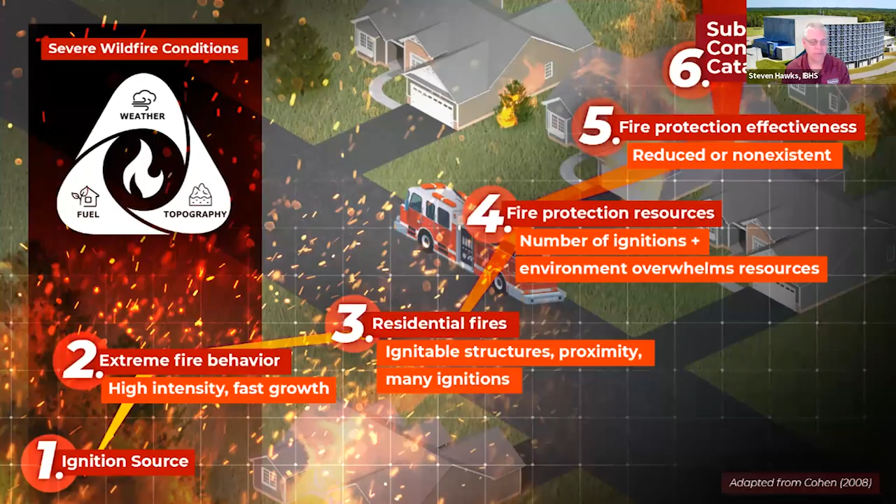And when that occurs under these strong wind conditions, then it can lead to a suburban conflagration, like we've seen on the Carr Fire, the Camp Fire, Tubbs Fire, recently with the Lahaina fire, to name just a few. I really like this picture here. It was taken on the Camp Fire, and NIST conducted a post-fire analysis of the Camp Fire and has produced 4 documents related to that, and has another one, a 5th one, to come in the near future.

And so Alex Maranghides from NIST conducted a lot of technical discussions, and one was with a CAL FIRE engine company that was in this neighborhood. CAL FIRE took these pictures, and this is in Magalia, California, just north of Paradise. And I really like it because you can see the 3 means of transportation that the fire can take to get to a house. So if you can see my cursor, the fire in the picture on the left is on the fence and the tree.

So that direct flame contact from the tree is getting to the structure. And I think you can see maybe a little bit of fire underneath the eaves right here. So direct flame contact can extend the fire from a tree or some other burning object directly to the house. Radiant heat from these items burning together can also extend that fire to the structure. And then up here above the house, you see all the embers coming off the tree and other items burning nearby that are landing on this structure and then being carried downwind and landing on other structures. So those are the 3 modes of transportation that a fire can take to get to a structure.

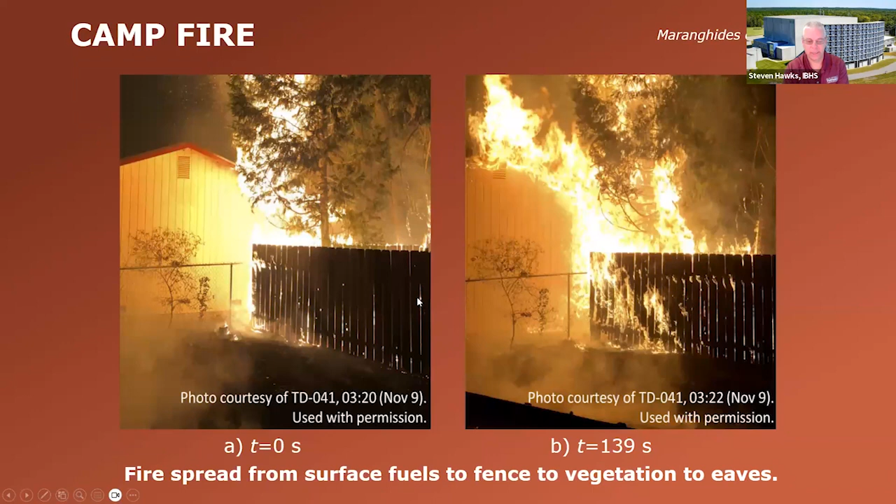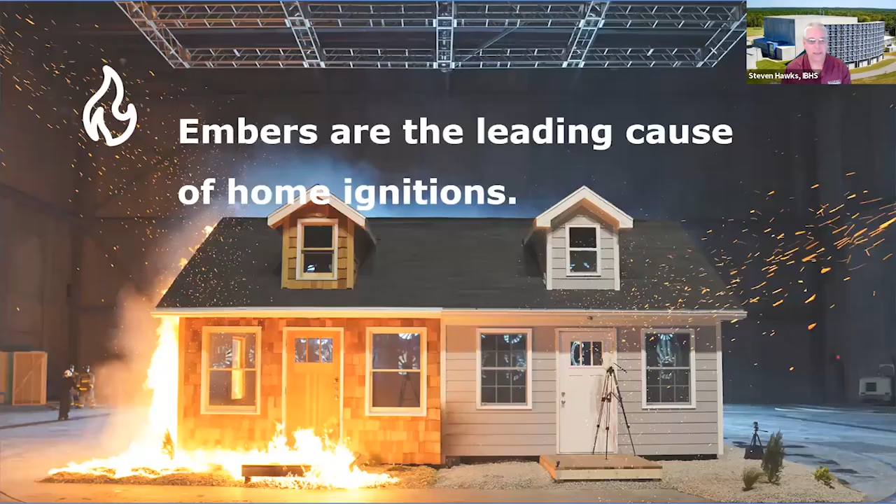And when you combine things like combustible items on the ground, maybe wood debris, leaves, pine needles, mulch, the fence, this tree, all those things burning together create enough intensity and enough direct flame contact that they could ignite that structure and bring it to the ground. So embers and flames, that's what we need to protect our structures against. And through a lot of experiments that we've conducted at the lab, not only us, but also other research organizations like NIST, as well as post-fire analysis, we've determined that embers are the leading cause of home ignitions.

And so first and foremost, we need to deal with the embers because they're always present, no matter whether the fire is in grass, brush, timber, or burning fences or other outbuildings or other items on a property. If it is a combustible item and it can burn, it can also produce embers. And then those can transmit to the house, either directly by igniting something on or within the house if the embers pass through a vent, or if they land in the 5 feet immediately surrounding a structure. If an ember lands in that area, it can ignite items within that first 5 feet and then indirectly extend that fire to the house itself.

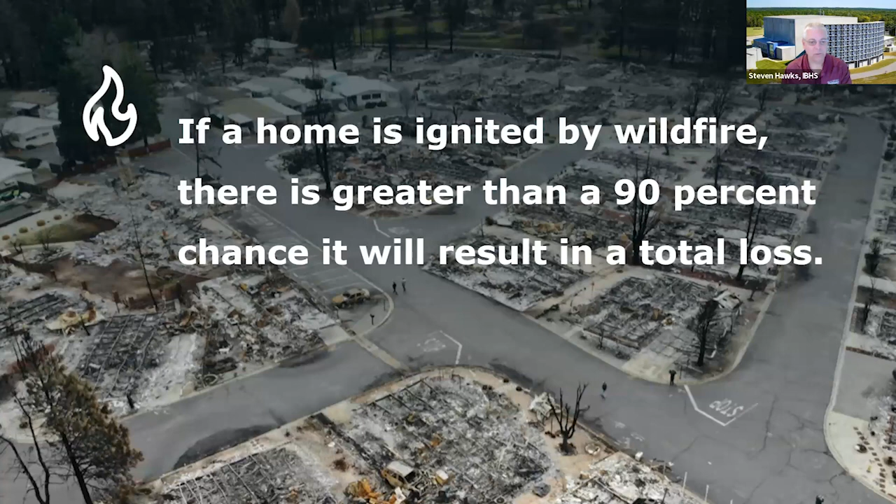And we know from the CAL FIRE damage inspection database that if a home catches fire, there is greater than 90% chance that the house will be completely destroyed. So we need to protect homes from catching fire in the first place.

And so I really like this picture. This is inside the test chamber at the IBHS Research Center in South Carolina. And you can see we have ember generators that we can expose a structure to embers and then see how those embers flow around the structure and how they interact with the different building materials and components of the structure.

So first, you can see that a certain number of embers flow up over top of the structure. They also get underneath the eaves and can travel in through vents at the eave line, as well as if there's any spacing between the roof structure and the wall where that intersection comes together. Potentially those embers can get in through those areas into the attic space. Embers also flow around the structure to the sides.

And then the last thing, and one of the biggest and most important things to understand about this picture, is the vortex that's created as these embers are cast by the wind. In this picture on the right-hand side is our big bank of fans, and it's blowing these embers up against this structure. When the embers are cast up against the structure, it creates a pressure against that structure and causes a certain number of these embers to travel down and then back away from the structure. So these embers are being pushed out away from it.

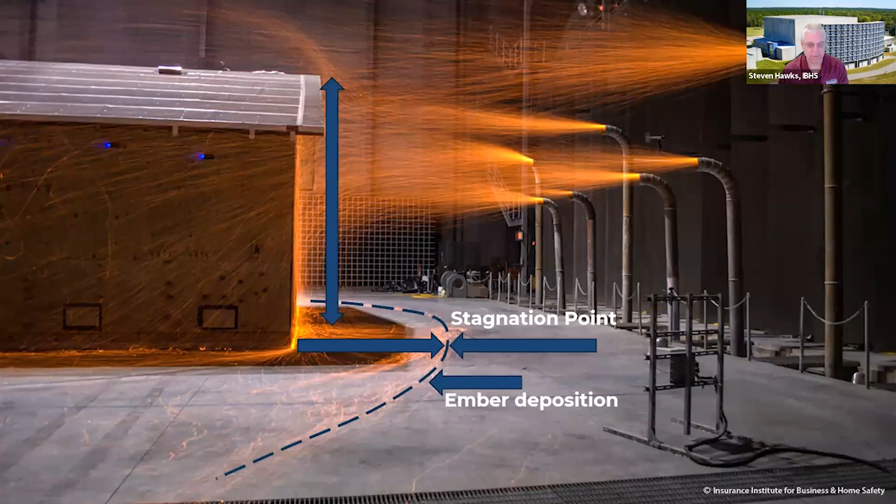So now I'd like to switch and talk about each of the exterior components of the structure, starting at the roof line down to the ground. Then we'll talk about decks, fences, and outbuildings. On the screen, one of our researchers, Faraz Hedayati, looked at a lot of papers, finding where certain things are cited about each of the different components and bringing forth all the relevant research conducted in wildfire mitigation related to the built environment.

And we definitely see a statistical correlation between wood roofs and loss of the structure. Fortunately, over 99% of the structures in California have a Class A rated roof already. So a wood roof is not something we see a lot out there in California.

But if there is still a wood roof, particularly a non-fire retardant treated wood roof, it definitely needs to be replaced because the roof is the most vulnerable component of the structure. It sits high up, it's a large surface area, has a tendency to allow for the accumulation of debris, and also allows for the accumulation of embers during a wildfire. It's never a good thing to bring those two together, especially on a combustible wood roof, and that could lead to the loss of the structure.

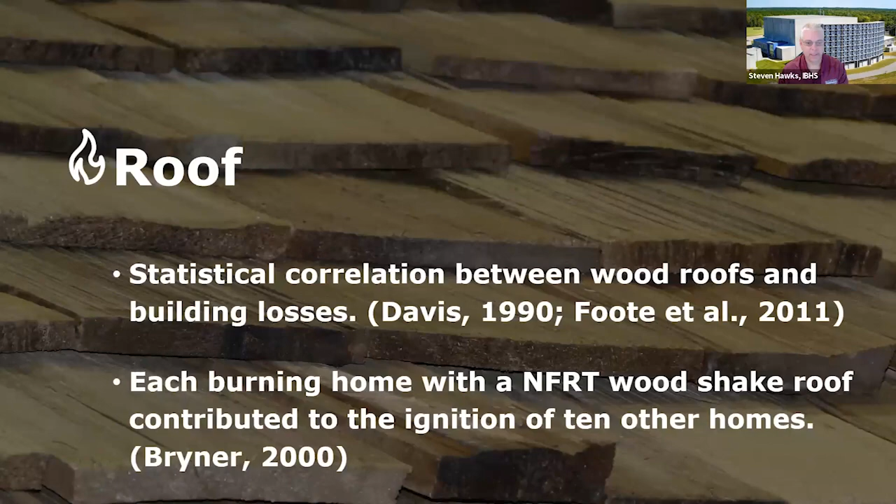We've also seen that, as I just mentioned, because of the design of a roof, debris can accumulate in the valleys and in gutters and other areas of the roof line. And wherever debris tends to accumulate is also where embers during a wildfire will gravitate to for the same reason as the debris does. And when you ignite those two, it's never a good thing. But having a Class A rated roof will hopefully allow that material to burn off and the roof will stay intact and protect the home.

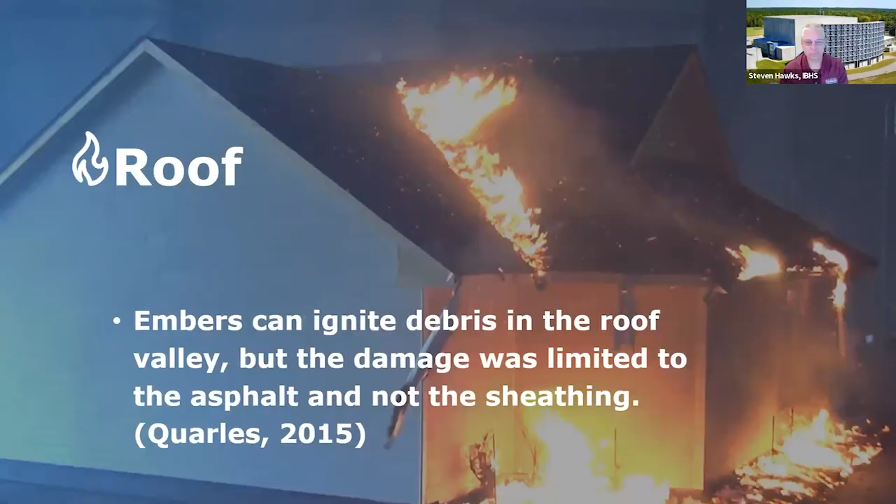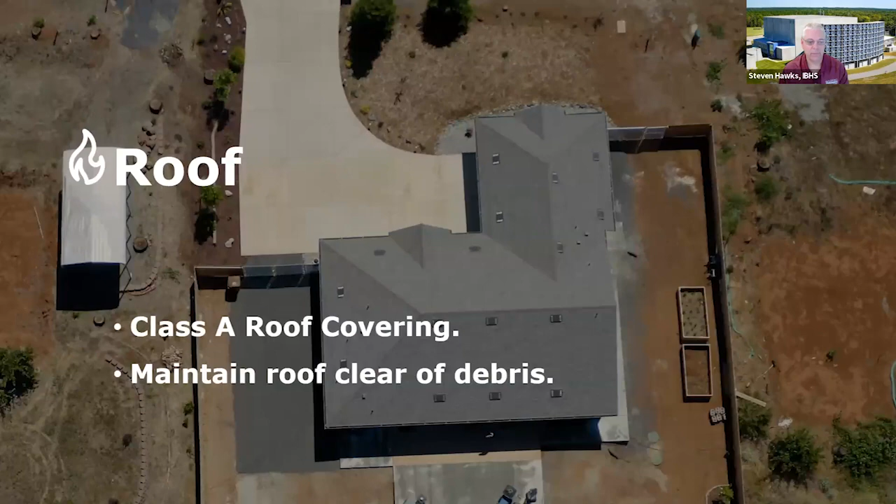So our guidance on roofs is first, have a Class A rated roof. And then secondly, maintain that roof clear of debris at all times, particularly when wildfires are prone in California during the summer months.

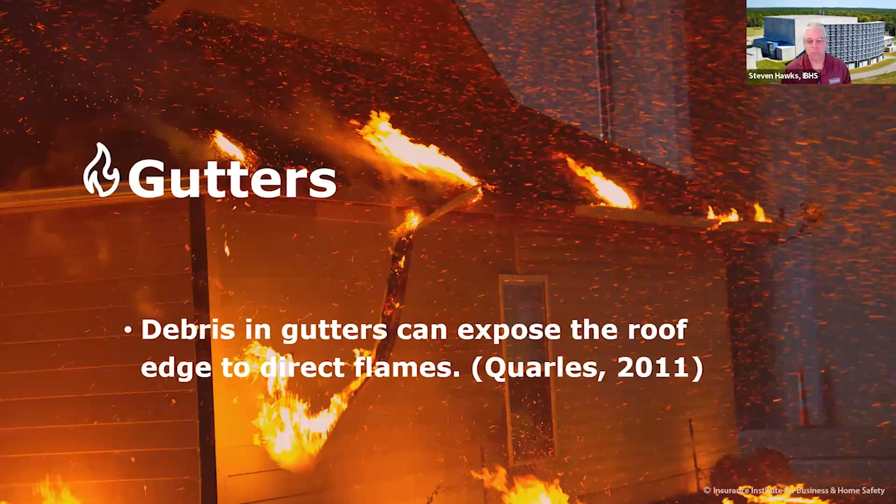And when you have a vinyl gutter, that can melt and drop to the ground, exposing the wood fascia board behind it, which exposes that roof's edge to direct flame contact. When you have a metal gutter, even though the debris may be burning inside, that metal gutter is protecting that wood fascia board and that roof's edge from that direct flame contact.

So our guidance for gutters is non-combustible gutters and downspouts, and then maintain a non-combustible gutter cover over top of that to prevent debris from accumulating inside the gutter. However, in this example, debris can accumulate on top of the gutter up against the edge of the roof right here. So even though you put a non-combustible gutter cover on, it still likely does require some maintenance of clearing off debris from on top of that gutter. We don't ever want debris accumulating here and then embers igniting that debris right at the roof line. So it still does require some maintenance of debris.

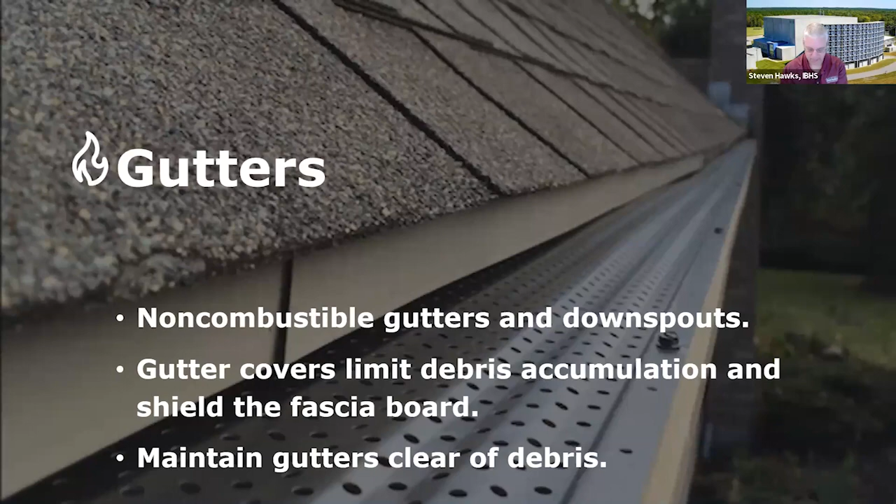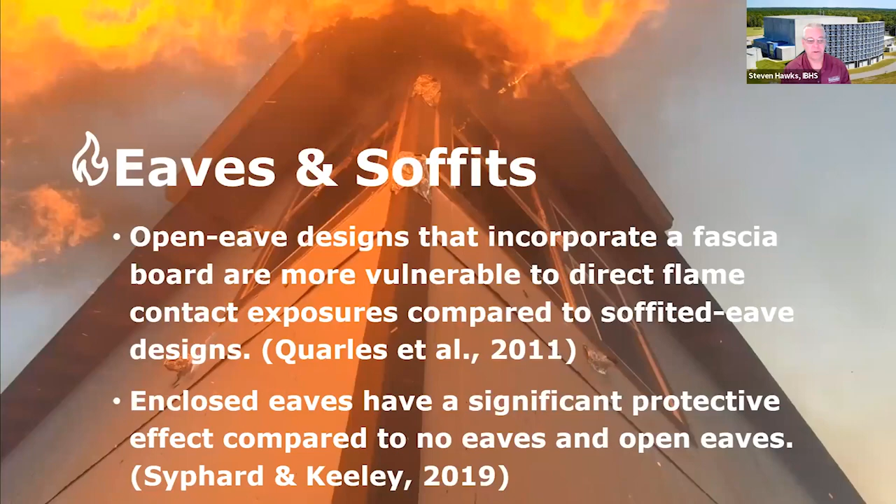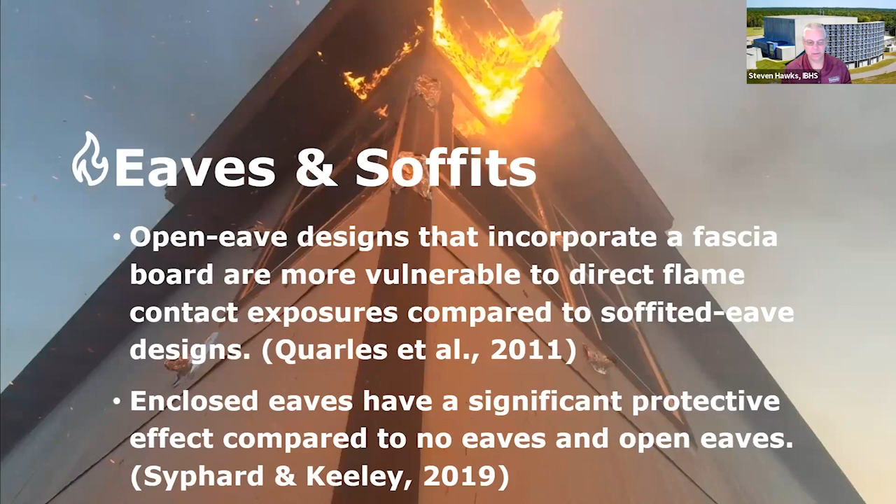Okay, eaves and soffits. So open eave designs that incorporate a wood fascia board are vulnerable to direct flame contact, as you're seeing in this experiment that we conducted just outside the test chamber at our facility in South Carolina. They're an area where flame and heat can accumulate underneath, and they're also areas where vents are located. And when you put that combination of things together, that allows for the fire to get developed underneath the eave line, to travel in through openings in wood blocking or through the vents themselves, and then could lead to the destruction of the house. So the guidance for eaves and soffits is to enclose them and do that with non-combustible materials.

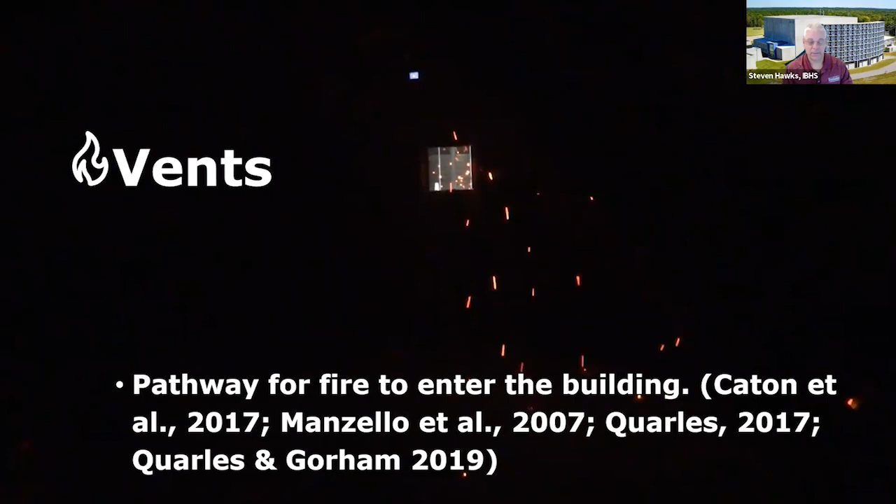Vents with just metal mesh greater than 1/8 of an inch, as you see here in the video, allow for embers to pass through into the space behind wherever that vent is located, whether it's a foundational vent or an attic vent, or a vent that's up on the roof line. So our guidance for this is vents with metal mesh that is non-corrosive, that have openings of 1/8 inch or less. Now we like to say 1/8 inch is the best because it prevents the embers from passing through that have enough energy in them to ignite something combustible on the other side of that vent.

So when you get down to a 1/16 of an inch vent, then those vents tend to clog up a little bit easier and don't perform their normal function of allowing airflow to get in and out of the structure to keep moisture down inside the attic space. So it's a combination of trying to accommodate for what the vents are normally designed for, airflow and keeping moisture out of the attic space, as well as providing for fire protection.

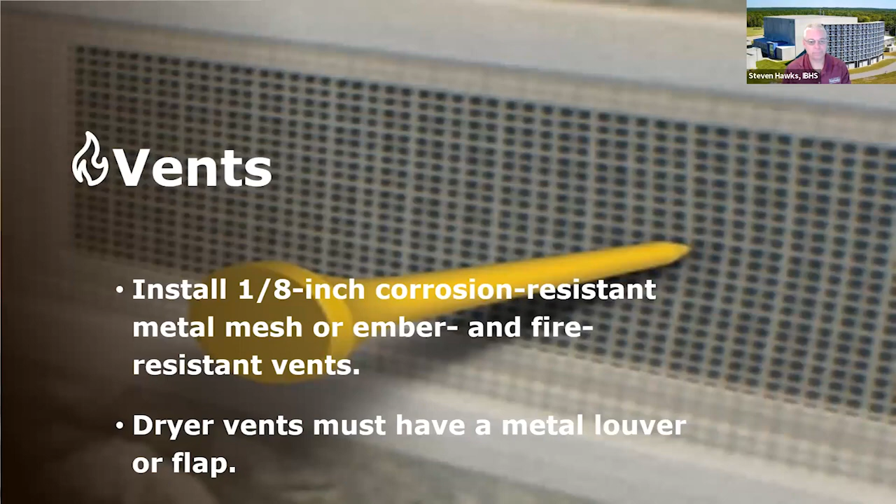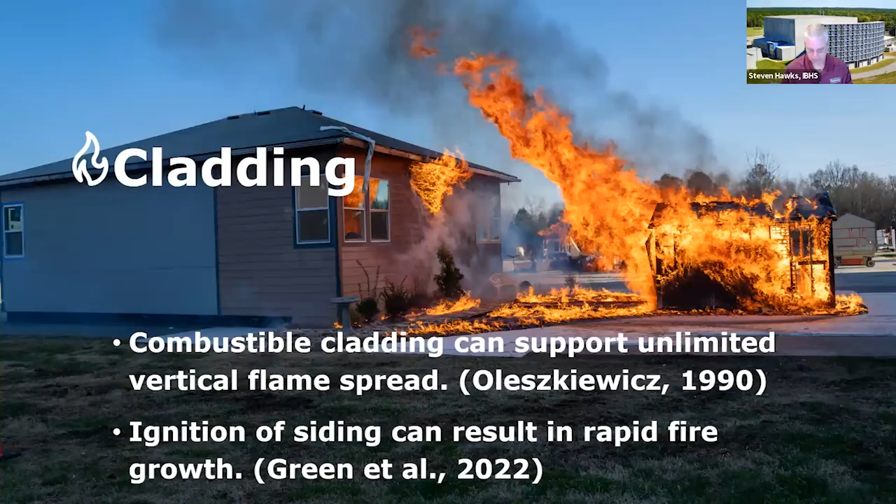For siding, combustible cladding or siding allows the fire to spread quickly vertically and expose other areas of the structure like windows, the under eave area, vents to the fire, and can result in rapid fire growth. So what we like to say is non-combustible siding reduces the vulnerability of walls to flames.

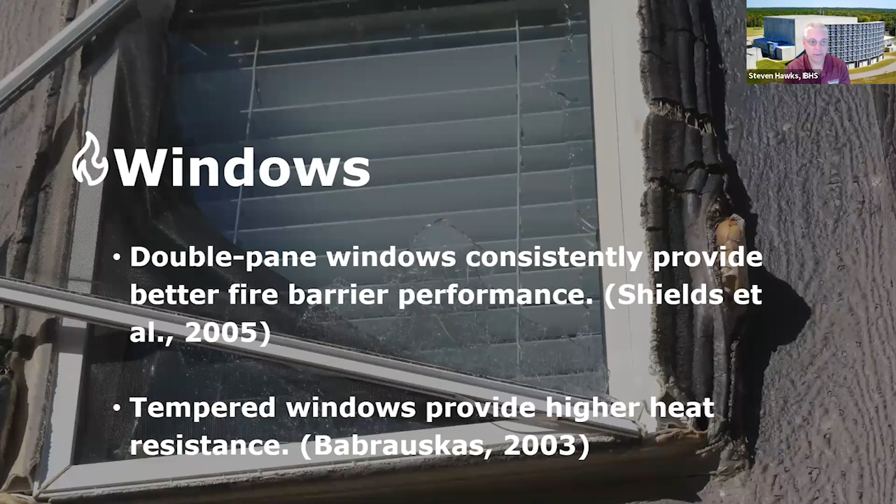Also, this frame that holds up this vinyl screen that was over top, you see it bent down here, but screens do provide good protection for windows from heat and provide added protection to the glass behind it, allowing it to withstand radiant heat longer than it would if the screen wasn't there in place.

So the guidance here is multi-pane windows with at least 2 panes, and both of those panes being tempered glass provides the best protection. And where you have a window that is openable, have a screen that covers that area, so that in the event that that window is open and you're unable to shut it as the fire is approaching, that'll provide some level of protection, hopefully enough to not allow embers and flame to get inside. But it also does provide an added layer of protection to the glass behind it, helping to make it stand up to the radiant heat for a longer period of time.

Now, Underwriters Laboratories, their Fire Safety Research Institute, is conducting some testing on windows right now. And they're looking at different configurations of windows, both being dual paned, but dual pane with both panes being annealed glass, dual pane with 1 pane being annealed and 1 pane being tempered, in different configurations of the tempered being on the outside pane or the inside pane, or a dual pane where both panes are tempered glass.

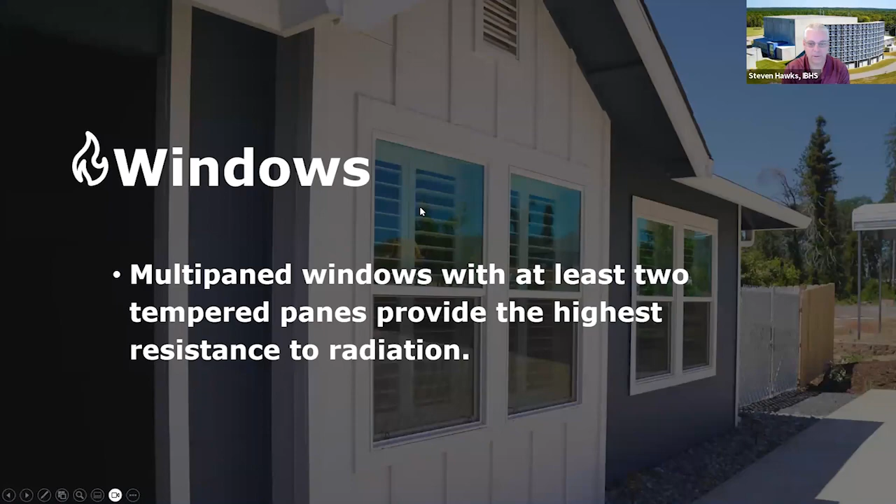So on the doors, the vulnerability here is the base of the doors, really from accumulation of debris and embers getting up against the doors and the wood framing of the door itself. NIST was able to, during their post-fire analysis of the Waldo Canyon fire, determine that this was a frequent damage on that fire. We've seen this in other large fires as well, that doors can be a vulnerability. And so the guidance for doors is to have a fire rated door with at least a 20-minute fire rating, or have one that is non-combustible, metal, fiberglass, or something similar.

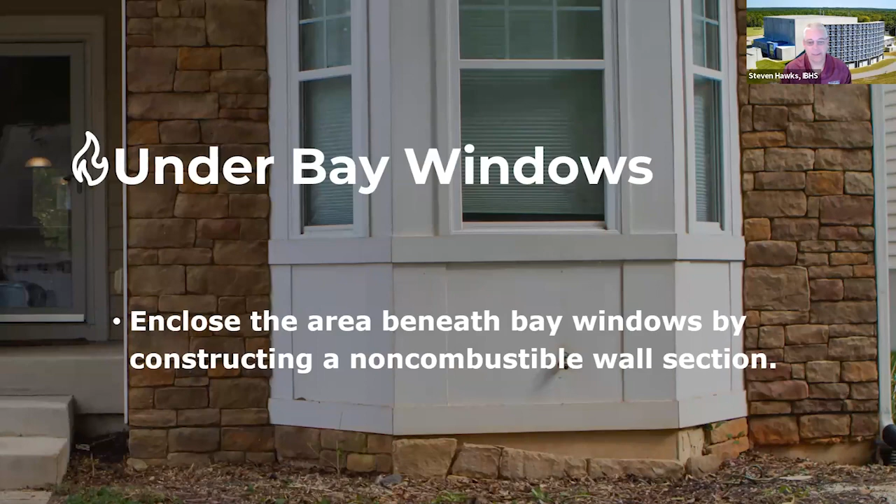So our guidance is to extend this wall all the way to the ground and make it non-combustible materials, so that fire doesn't have a chance to get underneath that bay window and present a problem, because under bay windows can be considered very similar to underneath an eave, where heat and fire can get trapped in that area and present a problem.

So 6 inches of vertical non-combustible space. Remember, if I go back to the couple slides I showed of the embers with the research that was done in our test chamber at our laboratory in South Carolina, that those heavy embers fall to the ground and travel right along the base of the ground and that wall where they intersect. And so that's why we recommend 6 inches of vertical non-combustible area there.

It also happens to coincide with moisture issues unrelated to fire that codes are taking into consideration, that have stem wall that comes up off the ground, keeping the wood and other items off the ground because of moisture issues. Well, this is a co-benefit of also taking into consideration wildfire preparedness of that 6 inches, because if you have debris, even if you're really on top of clearing debris from around your home, during a wildfire event that's associated with wind, debris can come out of trees, blow up against the structure, accumulate in this area.

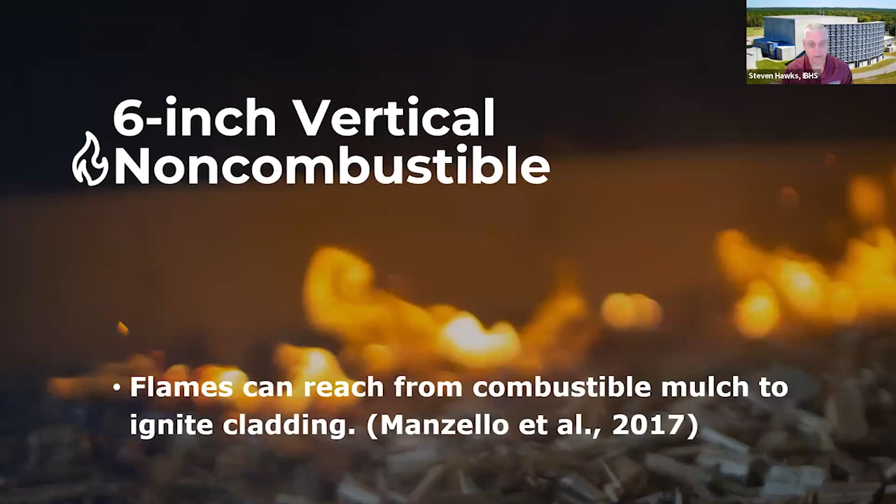That's also going to be a location where embers will gravitate to and could ignite that debris and extend it to the siding of the house. So 6 inches of vertical non-combustible area is really important here. And so this just illustrates that. That could be the 6 inches of the concrete stem wall from the house, if that's how your home is constructed, or a combination of the concrete stem wall and the siding. As long as we have 6 inches of vertical non-combustible area, that meets the requirement.

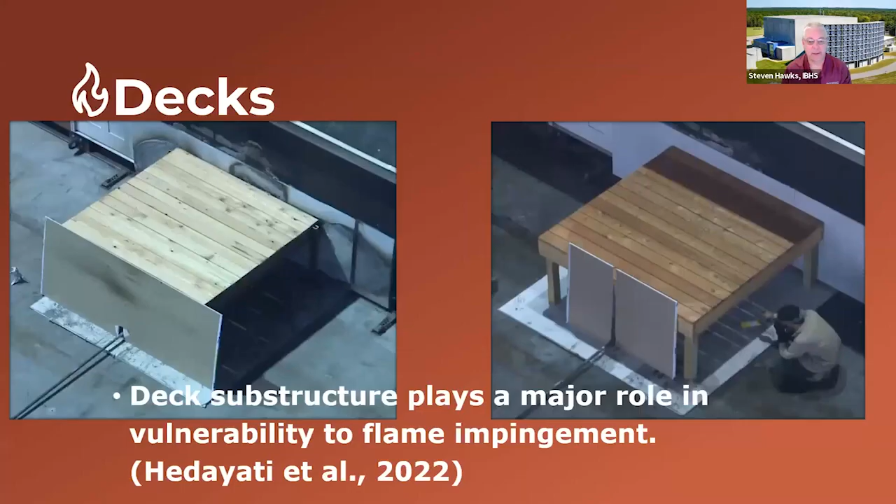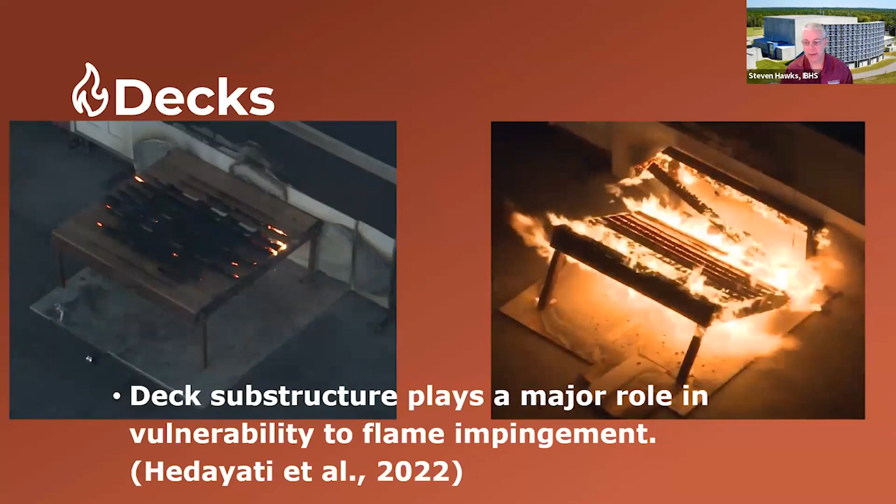So on to decks. Decks can be vulnerable both from the top and from the underneath. Obviously, from the top, their exposure is mostly from embers, but from the underneath, it is from a fire developing or flames developing on the underside of the deck. So we'll play this short video here. This is research conducted at our laboratory. The deck on the left-hand side is wood surface area, but it has all metal framing components. Over here on the right-hand side, it's the same wood surface area, but combustible wood framing components, and you can see the difference between the two.

So a fire starting underneath the deck is the biggest hazard to the deck, to a fire getting to the deck, and then that deck transmitting that fire to the house itself. But we also need to be cognizant about embers landing on top of the deck boards and potentially igniting a fire and allowing that fire to get to the structure as well. So our guidance here is clear the area underneath the deck. Nothing combustible underneath the deck. That is already a requirement by law, by Public Resources Code 4291 and the accompanying regulation in Title 14. So that is already a requirement.

Also, maintain an area around the deck of 5 foot of non-combustible area, and we'll talk about this in the very next slide. We'll get into that 5 foot zone immediately surrounding structure and other attachments like decks. Also, when a deck is elevated off the ground like this, but is 4 feet or less from the top of the walking surface to the ground, we recommend that you enclose that area with a non-corrosive metal mesh to keep debris from accumulating or blowing in underneath the deck. Also, an area where embers would blow in underneath, and having that combination of combustible debris and embers underneath the deck creating a fire is something we want to avoid.

So when a deck is 4 feet or less, it's really much more difficult for someone to get underneath there and keep it clear of debris and so forth. So that's why we recommend at that level, 4 feet or less, enclose that with a metal mesh. For a higher level of protection, you want to make sure that the deck is constructed out of non-combustible materials, ideally, including the framing members, the deck joists, and the railings and so forth. So anything that's combustible on the deck or the deck itself can allow the fire to get to the structure.

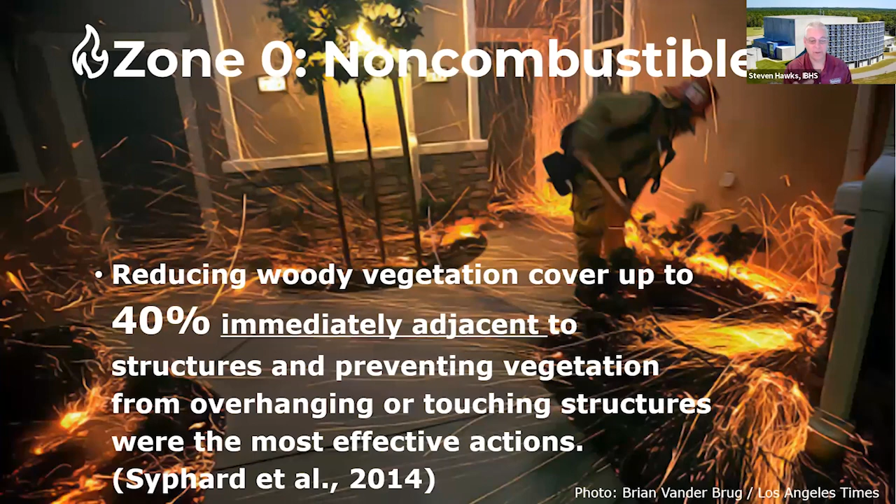And so Dr. Syphard conducted some research back in 2014 that said reducing woody vegetation cover up to 40% in this area increases the structure's chance of survival. We also conducted some research with Zesty AI, and reducing vegetation in this 5-foot zone nearly doubles a property's chance of surviving a wildfire. So for defensible space, this zone 0 is the most critical zone.

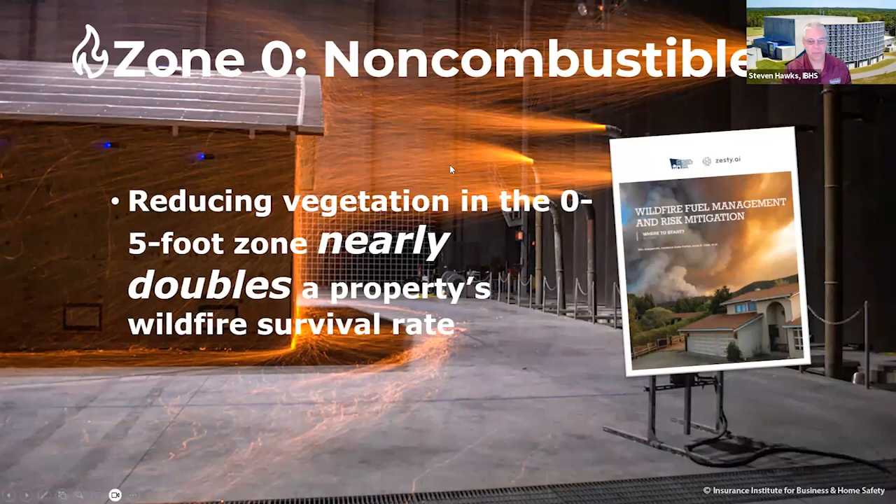Non-combustible. I go back to this picture that I showed you from our lab early on in the presentation. All these embers travel right up against the base of the wall and the ground, flow out away from the structure and form this line here around the structure. If there's anything combustible in this area, they could attach onto those combustible items, which can also accumulate debris during the wildfire as the wind blows debris out of trees and other areas into this zone 0. And then these embers can find that, ignite it, and potentially transmit that fire to the structure.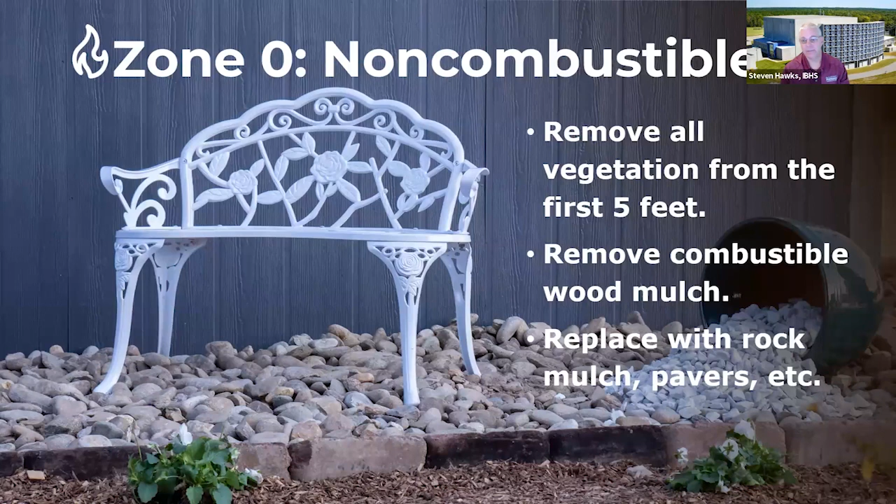So this is definitely an area where continued research is going on. We are actively conducting research right now on the flammability of plants as related to zone 0. But as of right now, our guidance is that zone 0 needs to be non-combustible. So on to the rest of the guidance. Nothing combustible in this zone, no vegetation, no wood mulch, and you can use other non-combustible items, including fences, and we'll get to fences in just a minute, but that includes the fences that attach within that 5 feet right up against the house.

But for the rest of the defensible space, NIST had done some research back in 2013 on a post-fire analysis where 67% of the homes that had unmaintained vegetation in the first 30 feet were destroyed, while 32% of the homes with maintained defensible space were destroyed. So there's no guarantees on any of this. We're trying to drive down the risk to the structure as much as possible. We can never get it to zero, but we want to get it as close to zero as possible, giving the home the best chance of survival. And that's what all of these mitigation measures we're running through do.

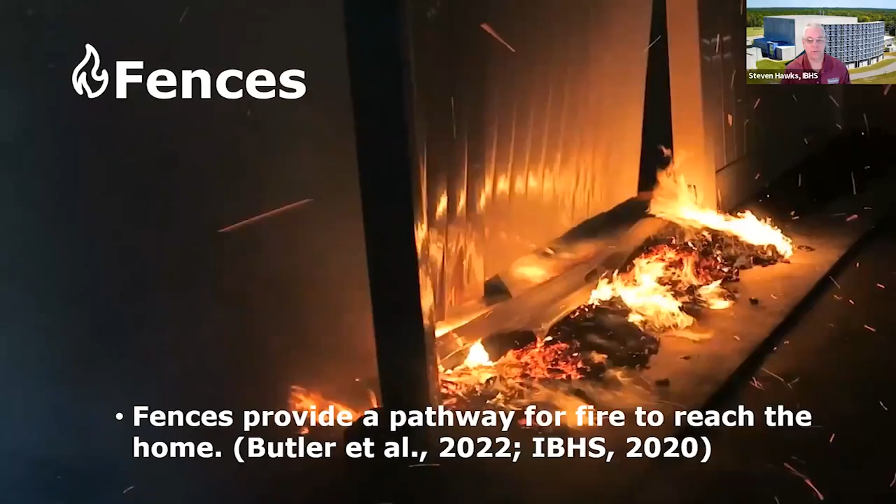So fences. I'll play this short video of some more research conducted in the lab at IBHS, where fences provide a clear pathway for the fire to travel directly along the fence line to structures. We saw that in the first video I showed of the grass fire that burned in Texas, that burned up to the fences, got all the fences burning along the backyards, and then allowed that fire to travel down the fence line between the homes and then over directly to the houses. So fences, being a linear feature that generally travels long distances between homes, have a big vulnerability of allowing the fire to transmit to the house itself.

NIST also did a lot of testing on parallel fences and released a report last year on parallel fences. And they said even out to the 4 to 5 feet range, the fire that develops between the fences is greater than the fire that would be on each individual fence if they were burning separately. But when you combine that, the intensity of that fire is less than the fire that's burning between the two fences. I hope that made sense, the way I explained it there.

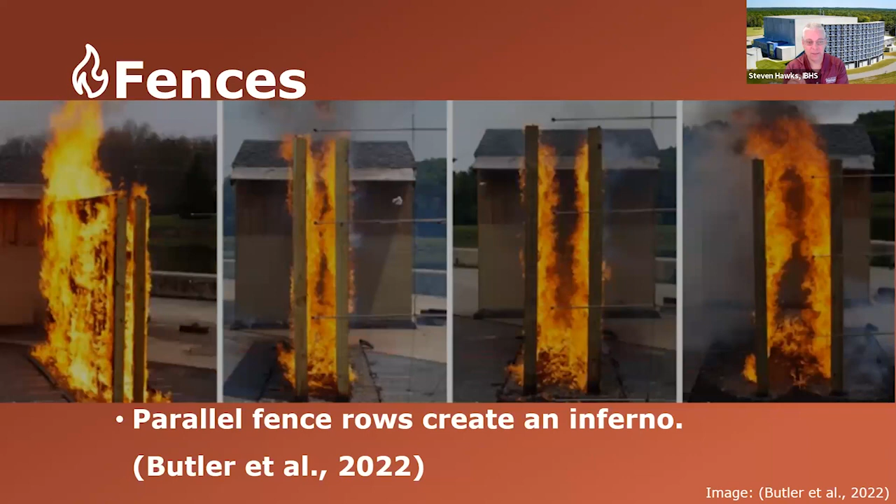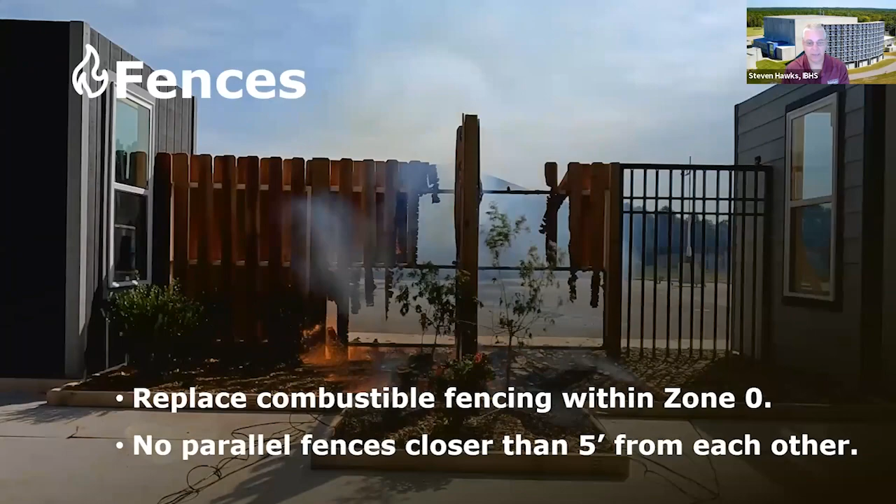But when parallel fences are less than 5 feet away and they're on fire, the fire intensity that comes out of that fence is greater than 2 individual fences burning by themselves. So the guidance for fences is to replace combustible fences within the first 5 feet of the structure. And this is what the demonstration that was conducted outside the lab at IBHS is showing here in this short video. And then no parallel fences that are closer than 5 feet from each other.

And you see that the fire started in the wood bark mulch here, transferred to the fence, and then that fence allowed the fire to go to the structure on the left-hand side. And watch the window here as it begins to deform, see the sag and then fall out. And as soon as the window fell out, I'll play this again, because I think it's really informative about windows and the vulnerability with windows here.

And watch as the fire gets to the structure, and then this window begins to sag up here. So that's going to create an opening, and then the window panes fall out, and then eventually the whole window assembly falls out. And once it does, then you really see the fire take off.

So about a month ago, we conducted 2 experiments like this in California, one in Orange County with the Department of Insurance, one in Sacramento the following day with CAL FIRE. Very similar demonstration to this. And in both of those demonstrations, we saw the exact same results as what you see in this video,

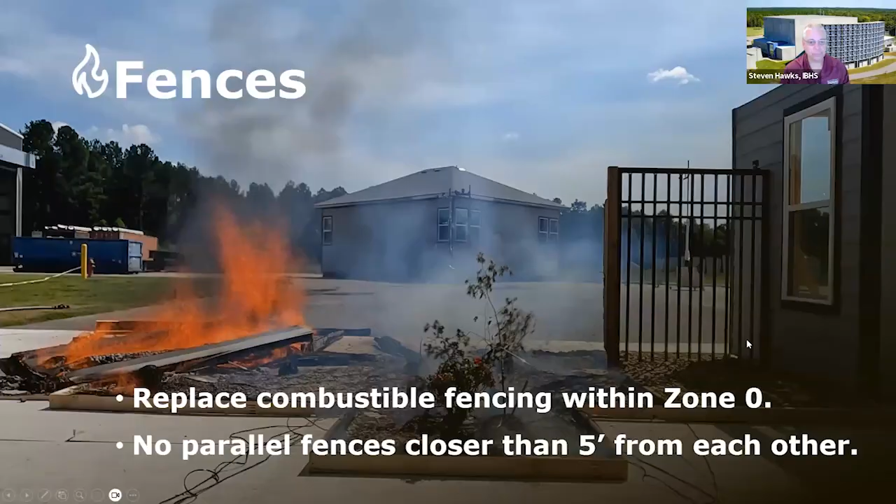So here's a video of some structure separation experiments that we're conducting, and NIST has been conducting as well. And it shows that flames and radiant heat can spread the fire from a shed to the home without firefighter intervention. And so what we're really looking to test is, one, the exterior materials of the shed, as well as the house, and then the structure separation distance between the two. At what distance does the shed no longer really present a hazard to the house if it was to catch fire?

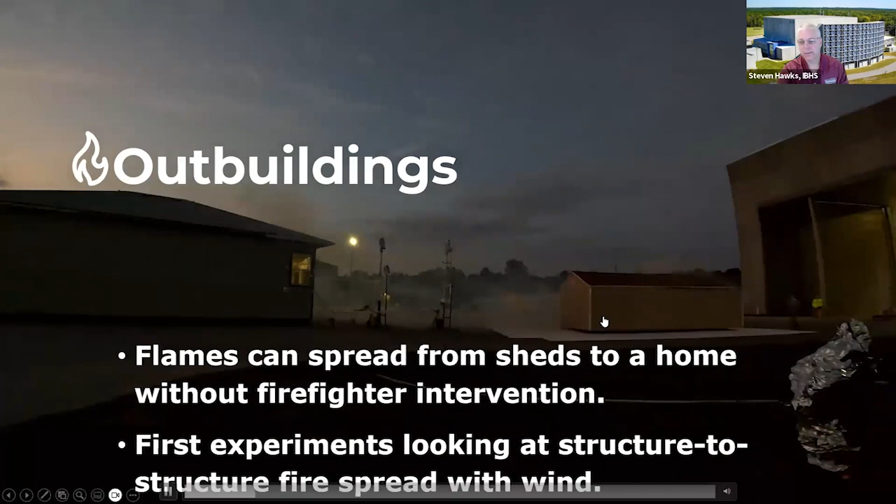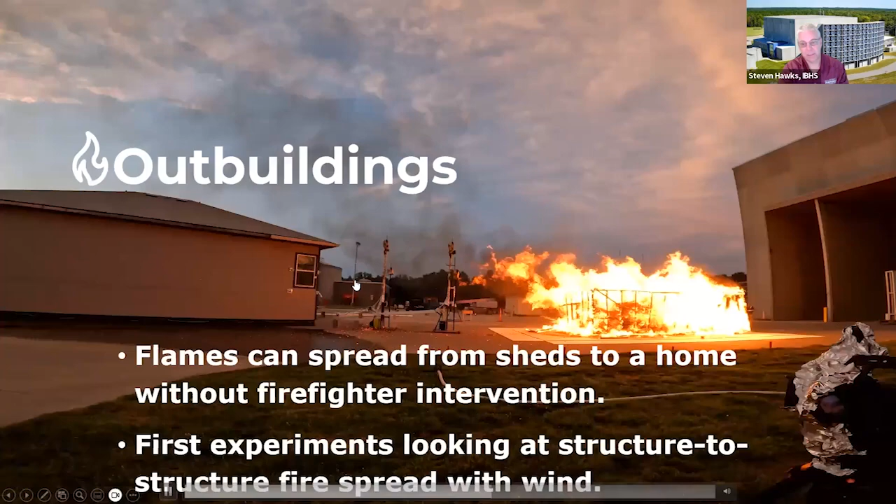And I'll go back for a second and show this video again, and really watch as the roof begins to collapse here and the fire starts coming out the roof line. So we have the wind coming from our fans from the right-hand side, blowing across the shed here. But as soon as this wall on the upwind side begins to burn away and become exposed, that's when this fire goes from coming up this direction to being more direct towards the structure itself. Hopefully you were able to catch that.

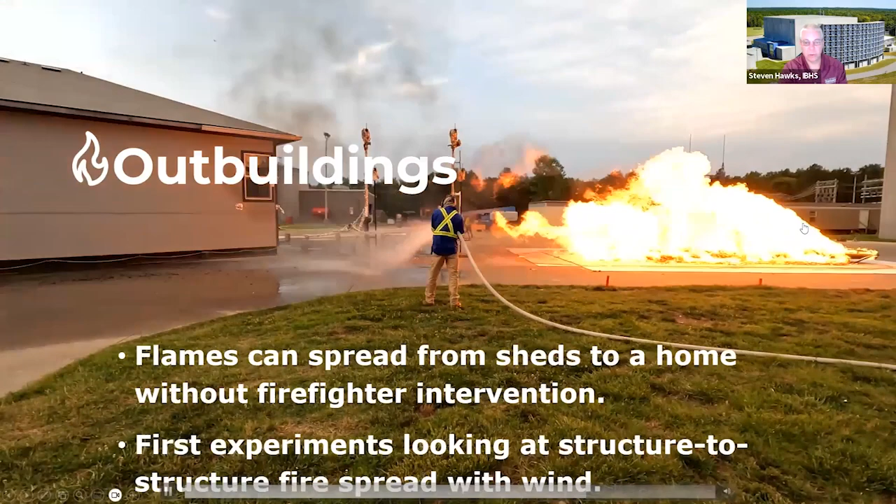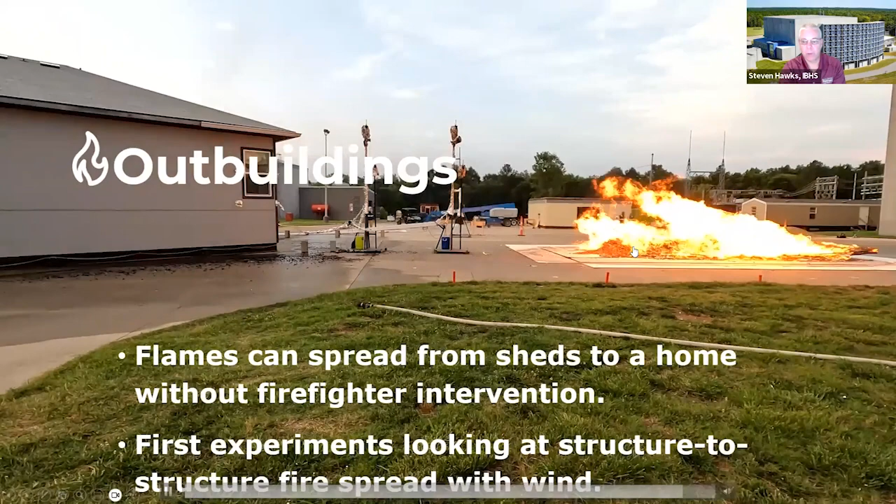So the point of this is the orientation of doors, the orientation of windows, the construction materials that the shed is made out of really play a big role in what exposure that shed will pose to the structure. And so watch here, I'll pause this briefly, but this window pane right now is falling out. And then in a second, this one up here will fall out as well. So I'm going to play this video a couple times, but we've seen this on a number of occasions.

This is where I mentioned when we were talking about windows that this molding here is vinyl, it heats up, it comes off the window, and in a dual pane window the glue behind it heats up and doesn't hold the pane in any longer, and the pane itself will fall out and break on the ground rather than stay in place. So we really need to look at windows as an assembly; the window frame as well as the window glass together make up the whole assembly. It's really critically important that we get those components right.

So I'll play this and you can watch the windows fall out and break on the ground. But during these structure separation experiments, our research scientist here, Faraz Hedayati, who's bending down over here, here comes the other pane, it's about to fall out.

He binned these into 5 damage categories: no damage, minor damage, severe damage, potential total loss, and total loss. And we've seen this video play a couple times now, so I'll go ahead and move on to the next.

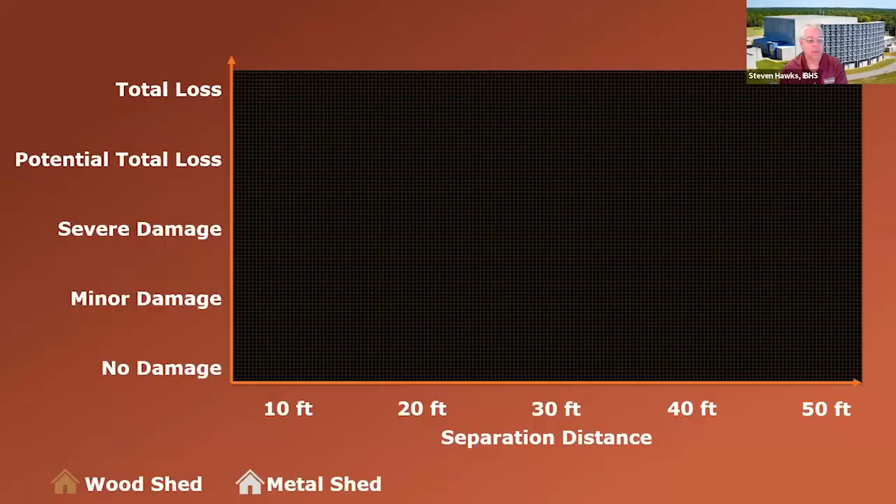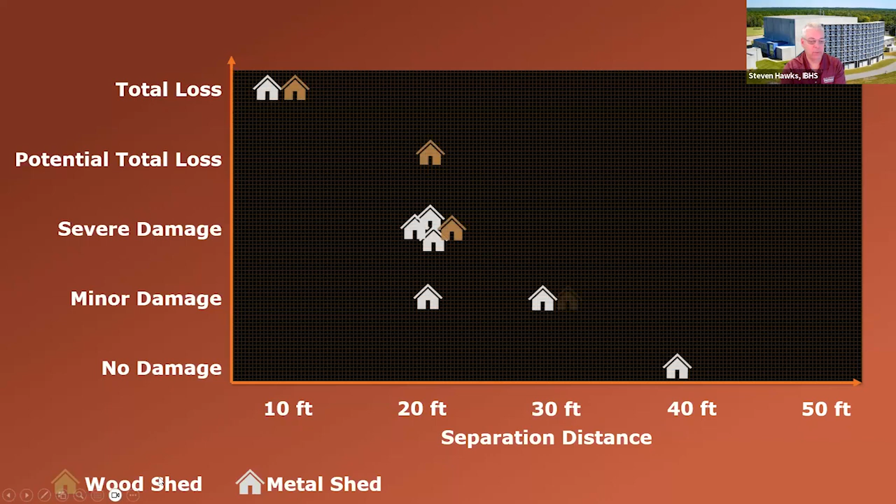And so all the different experiments are going to pop up here on this graph and show the separation distance, as well as whether it was a wood shed or a metal shed, and the category of damage experienced with that particular type of shed at that distance. We saw no matter if it was a wood or metal shed, at 10 feet it's always a total loss. And these shed sizes in this experiment were between 12 and 24 feet.

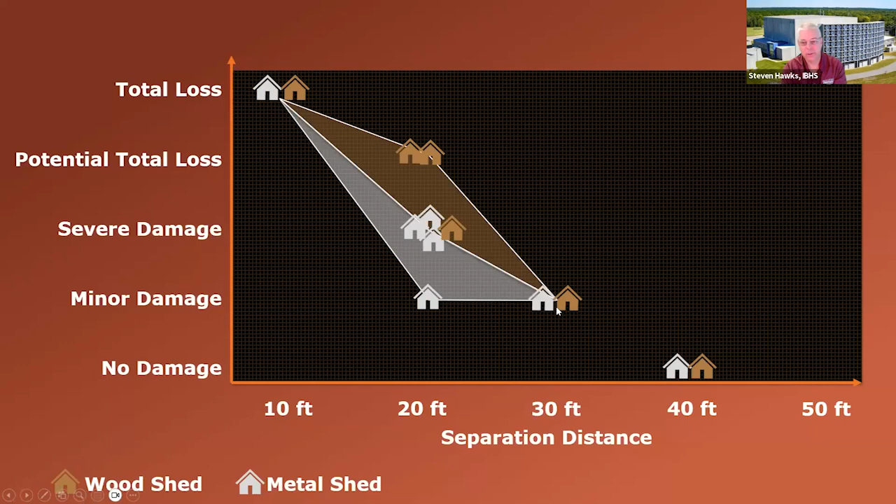At 20 feet, we saw a range of damage, and then at 30 feet, we saw minor damage, which is basically cosmetic damage, a cracked window or similar. So our guidance now is for outbuildings that we move sheds 30 feet away. And we also apply similar mitigation strategies as we do for the main home.

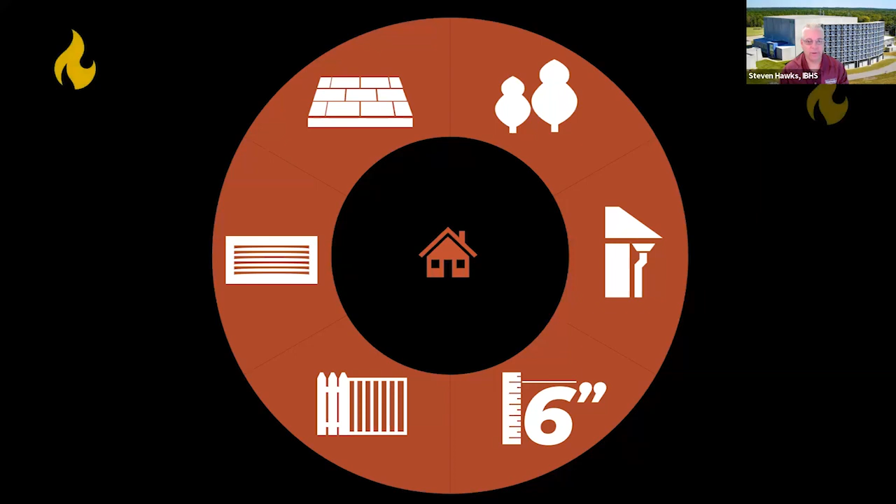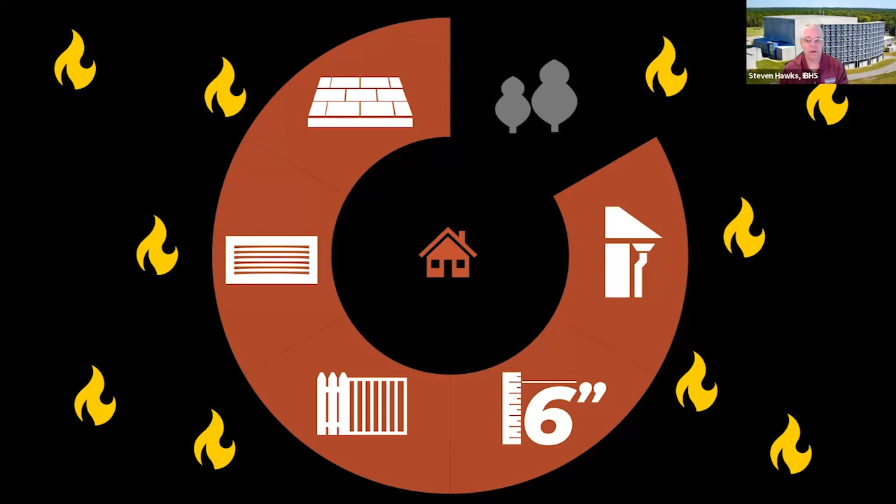So now that we've gone through all the different components, we like to talk about all of these things as a system that needs to work together. During these high intensity fires where we're having lots of embers cast onto structures, radiant heat exposure, direct flame contact, all of these components need to work together. And when you have one component that is still vulnerable, it can allow a weakness that allows that structure to catch fire and come to a total loss.

So that's where we get to a program that we've developed called the Wildfire Prepared Home Program. We have two different levels to the program, a base level and a plus level. And the items in the brown boxes on the screen are for the base level.

A Class A rated roof with no debris on it, gutters and downspouts that are made of metal, ember and flame resistant vents, 6-inch non-combustible vertical space around the base of the house and wall, no combustibles in zone 0, that 0 to 5 foot area immediately surrounding the house, nothing underneath decks, enclosed low elevation decks with metal mesh if it's 4 feet or less from the ground, maintaining good defensible space in the rest of the yard, particularly the first 30 feet, and then replace the fencing within the 5 foot zone as well.

So this program right now is only in California. It is for detached single family homes, not multifamily, up to 3 stories in height. And we're looking to potentially expand this program out to other states, Western states in particular, that are prone to wildfires like California.